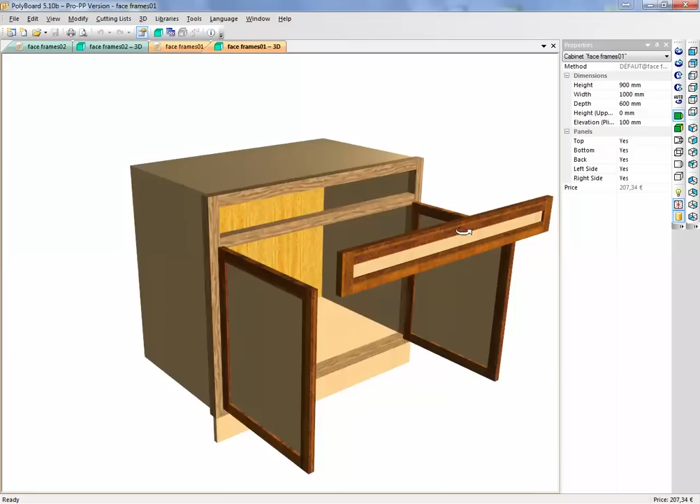In this video I'd like to show you how to set up a base cabinet like this, that has two opening doors and a dummy top drawer with an intermediary rail that supports the dummy drawer. If I close that, let's have a look. We can see we have a front frame with a rail on it, and the doors with a dummy drawer.

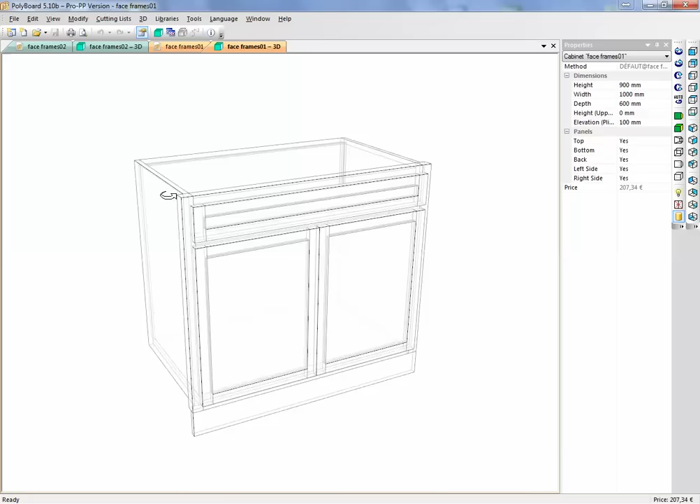So how do I set this up? The front frame is set up in the same way that I would set up the edging on a worktop that has solid wood edging - there's another video to show you how to set that up. So how do we set up this dummy drawer here and its intermediary rail?

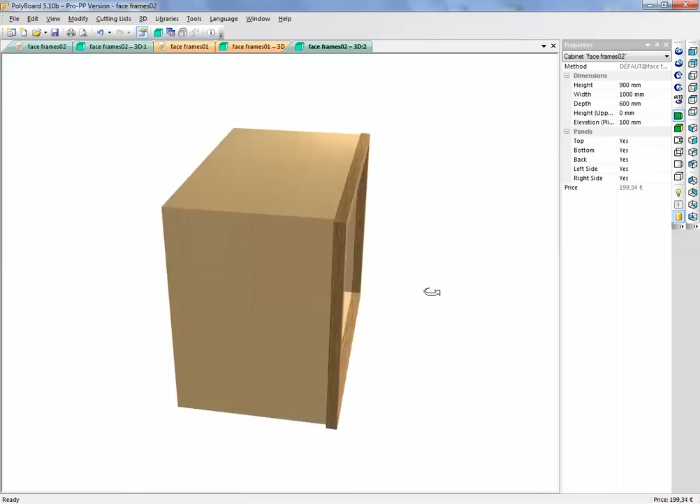Let's go into a cabinet which doesn't have that for the time being. Here we have a cabinet which has just got the front frame and no intermediary drawers. So let's set up the intermediary rail here. How do we do this?

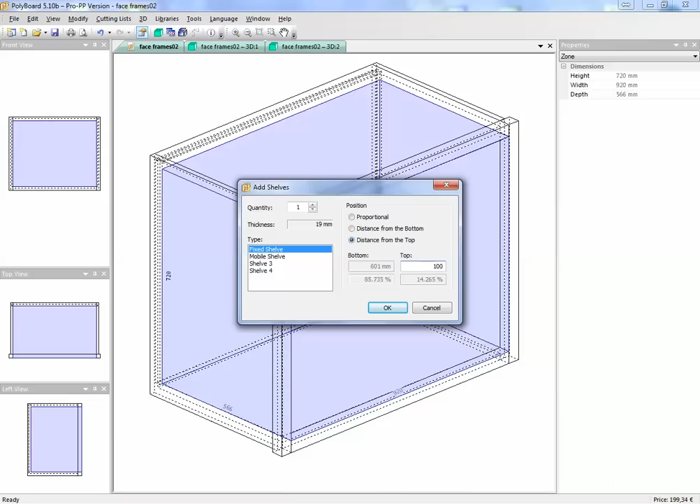I'm just going to switch off these ones here. To set up the intermediary rail, I will go into the cabinet and set up a shelf. This shelf, I'll put at a distance from the top equal to the position of the railing I want to set up. So for instance, if I want 100mm from the top, let's make it a bit more, say 120mm from the top, I'll get a shelf in here.

What do I want with the shelf? I want to have an edging on this shelf which corresponds to the thickness of my front frame. This front frame is made of a 40 by 40 section, and I could just copy a structure from the top shelf or the bottom onto this shelf, but I'm going to show you how to set it up here - the same method we use for setting up any frame which is just edging on our cabinet.

So let's go into the fixed shelf and edit, add an inner tooling. We add an inner tooling here, and take a rectangular inner tooling. The height will be the width or thickness of our front framing, or the thickness of our rail, and the width will be the full width of our cabinet.

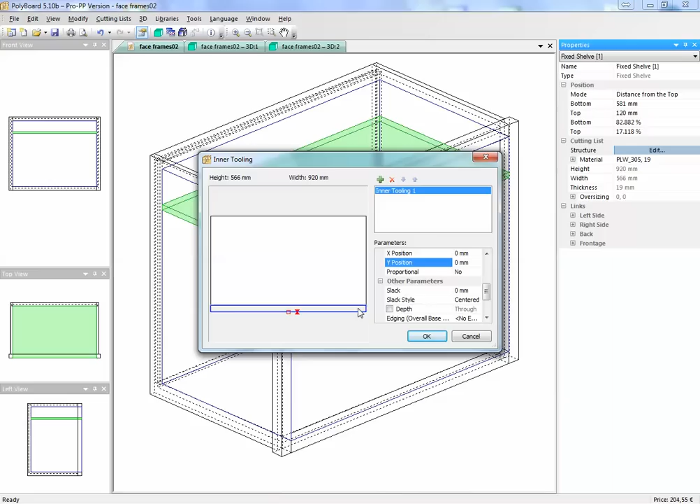This inner tooling we will position along the front of the cabinet so it sits along the edge like this, and the depth will be the depth of my board, my sheet material. I click OK, and now the shelf has been cut away, and we have what we call an inner tooling here.

This inner tooling has now become an element in which we can insert another material. By default it's nil material, but I can create a material - I'll use the material I've used for my other edging, which is worktop edging 40 by 40. Now if I look into 3D, we have a front rail going across, but we still have material behind it, which is the shelf material.

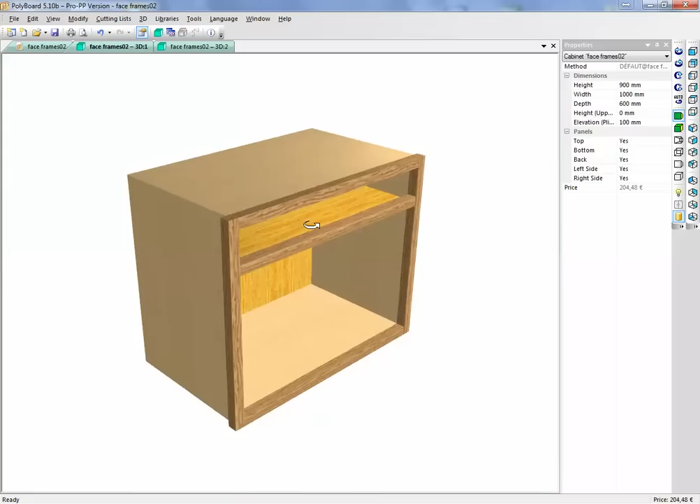Well, I don't really want the shelf material, so what do I do? I'll just click the shelf material, and say that the shelf material is in fact a nil panel - so there is no material there, it's just virtual material. And now we have our front frame with our intermediate railing.

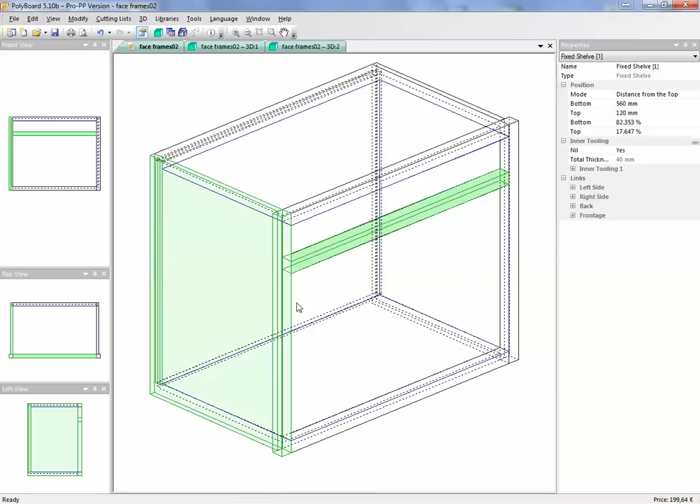Onto this space now, I can add a drawer front. Let's just have one drawer front without any assembly, because we don't want any drawer on it - it's just a dummy front. And we can say that from the top we need a slack of, if we've got 40, let's make 30mm from the edge of each side, and from the shelf itself we're going to add 10mm.

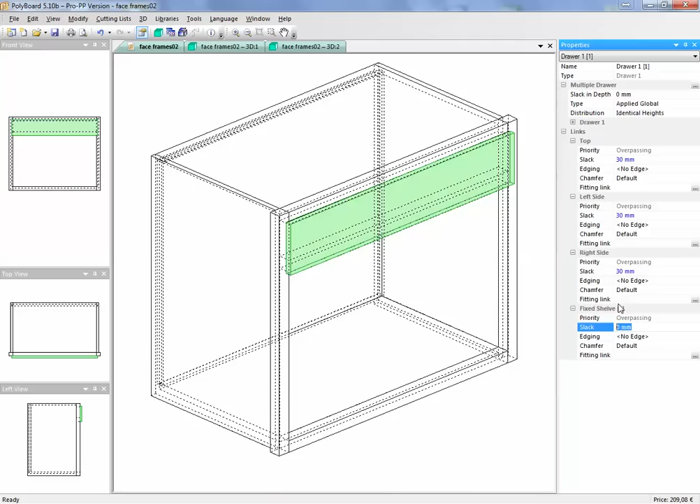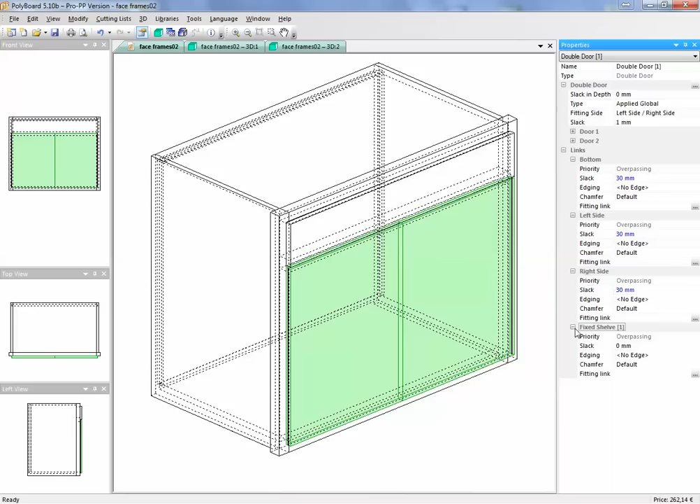Okay, now let's add doors here. Add a double door, and we're going to do the same. From the bottom, because we're overlapping, we'll give it a 30mm recess, set back 30mm from the right side and the left side, and on the fixed shelf give it 0mm. Has it all been adjusted? And what does this give us now? We have our doors plus our dummy front drawer.

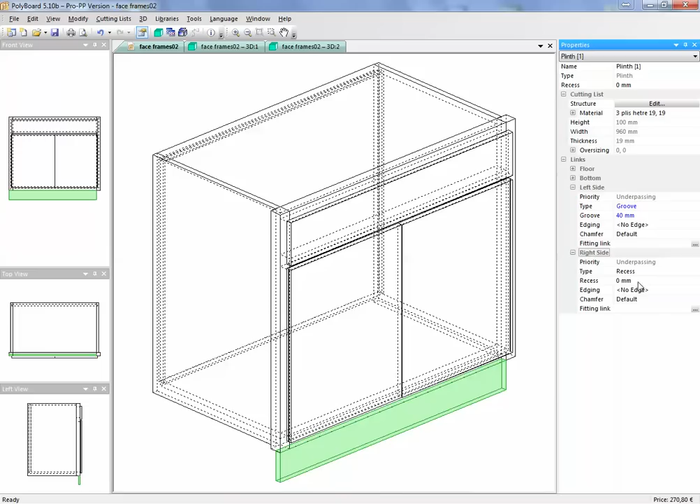We can also set up a plinth area underneath here. Let's add a front plinth at 0, which will give me a board that is just flush to the front. This board, we can extend to the limits of the cabinet simply by creating on the left side a groove assembly pushing it past by 40mm, and on the right side too creating a groove assembly pushing it on by 40mm, and here we have the cabinet.

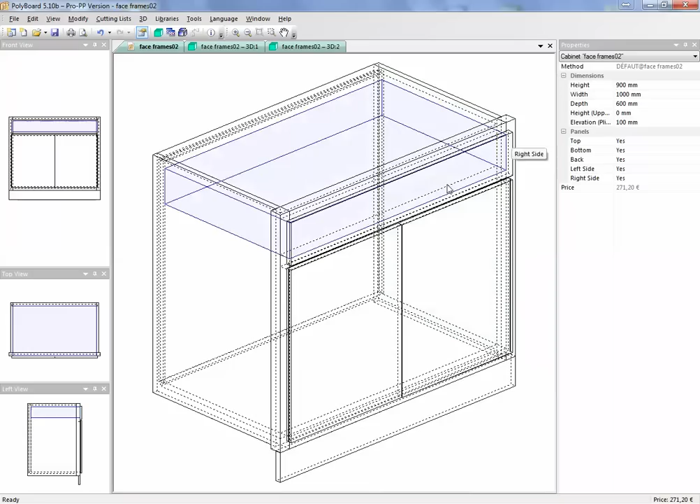Front frame, dummy drawer, and two doors. We can of course continue to make this cabinet look a bit more neat simply by adding assembly details - if we add to this first drawer, we can add an assembly detail.

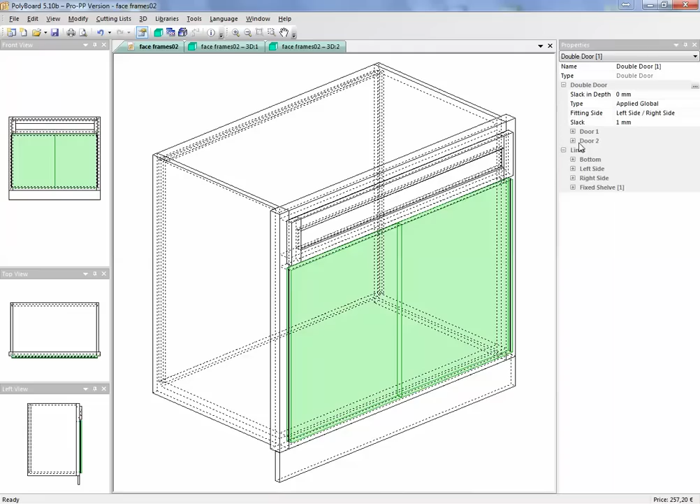Let's add an assembly detail that comes from the library - we have a simple assembly detail here. Let's add the same assembly detail to this door, coming from the library, assembly frame in mahogany, and on the second door we can do the same, add an assembly detail in mahogany.

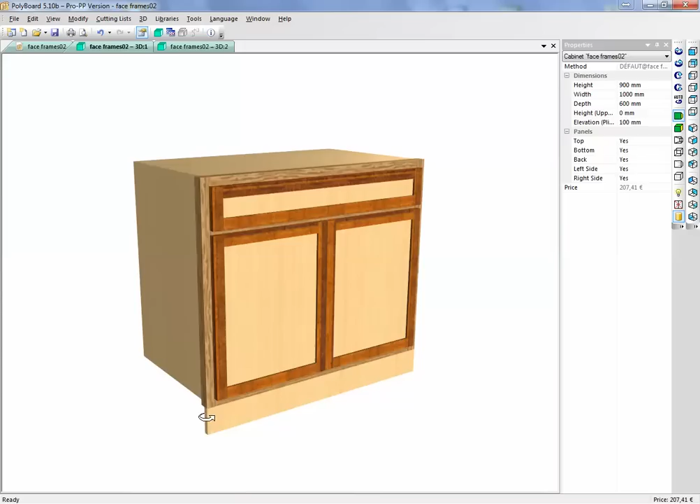And now we have the cabinet with two doors, a front frame, and a dummy drawer at the top, and a flush plinth here which we are going to use because we're going to have a skirting board going along glued to the front of this plinth.